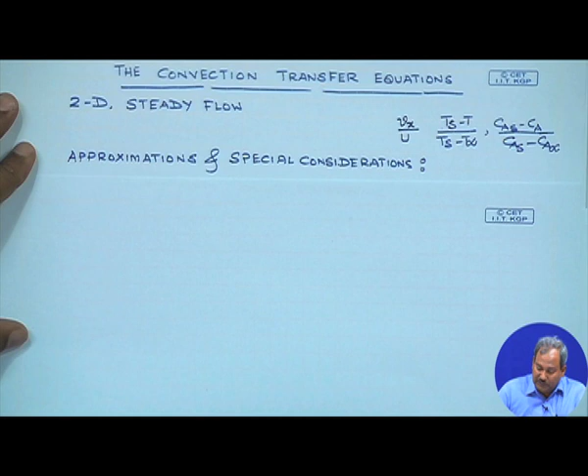Let us see the approximations and special considerations we are going to invoke to see these analogies. First, we assume an incompressible fluid. The fluid properties remain constant. Body force is negligible, so the effect of gravity would be unimportant. It is a non-reacting system, so there is no generation or depletion of component A by reaction, and there is no energy generation.

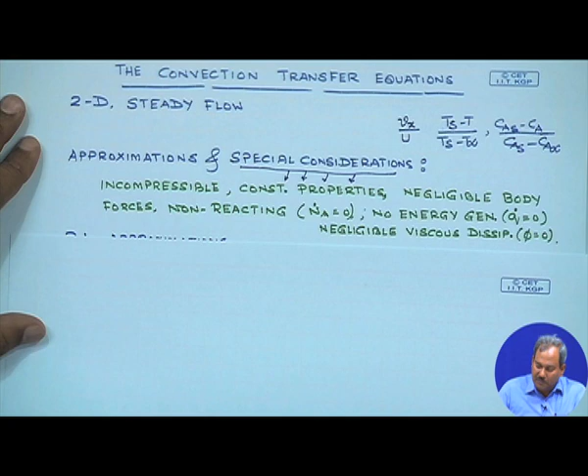So Q dot, the rate of production of energy, is equal to 0, and the flow velocities are moderate, so we have negligible viscous dissipation, or the viscous dissipation function phi equals 0. These are the special considerations we use to tackle simultaneous heat, mass and momentum transfer, and our starting point would be the convective transfer equations inside the boundary layer.

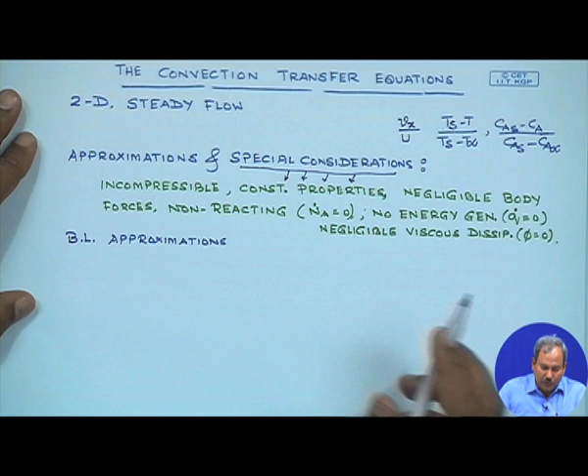So, what we then do is we are going to see what are the boundary layer approximations that we have used so far. We have already used that u, the velocity in the axial direction, is going to be very large in comparison to the component of velocity which is perpendicular to the direction of flow, and variation of axial velocity with y is going to be significantly larger than variation of the velocity with respect to x. So, del u del y would be significantly larger than del u del x, and it is also going to be very large compared to del v del y and del v del x.

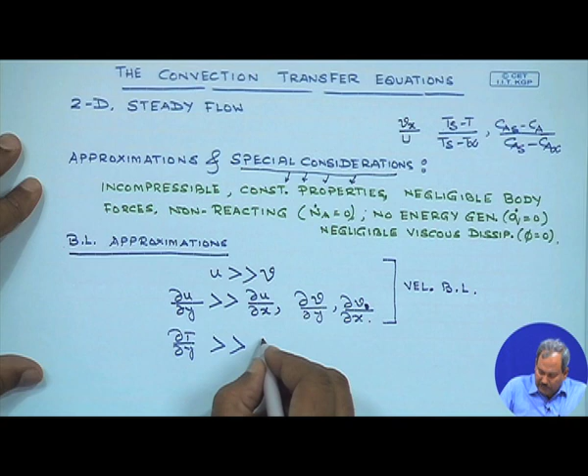So, the rate of change of axial velocity with distance from the solid wall is going to be significantly higher than del u del x, del v del y and del v del x, and collectively these are known as the boundary layer approximations for the velocity boundary layer. The second one that we have is del T del y is going to be very large compared to del T del x. So, T is the temperature.

So, the variation in temperature over the thickness of the boundary layer, del T del y, would be significantly higher than the axial temperature gradient, and this is the approximation which we have used before for the thermal boundary layer. All these assumptions are reasonable since the thickness of each type of boundary layer is very small.

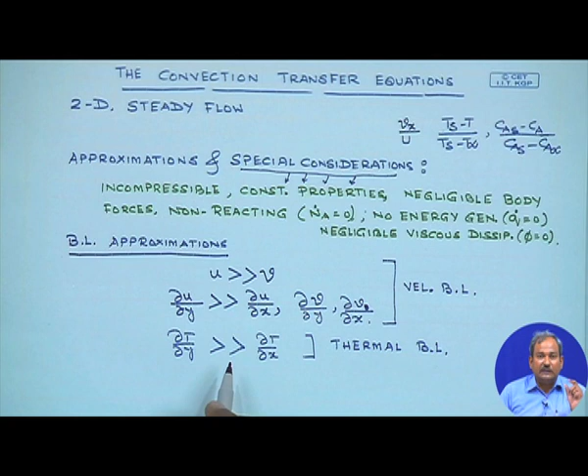So, since the velocity boundary layer is small, the variation in velocity from a value equal to 0 due to the no slip condition on the solid to the constant velocity U throughout the rest of the region outside of the boundary layer takes place over a very thin region. So, therefore, the variation in velocity with respect to y will be significantly more than the variation in velocity with respect to x. So, the vertical velocity gradient of the x component of velocity would be much more as compared to the gradient in the axial direction.

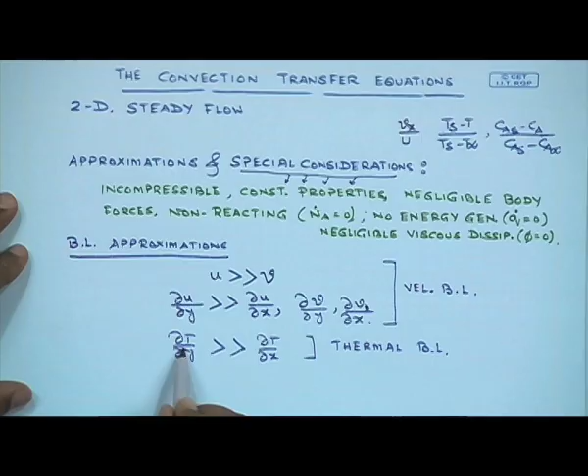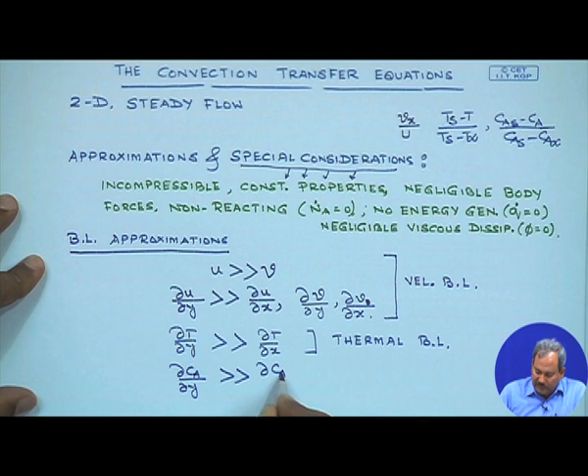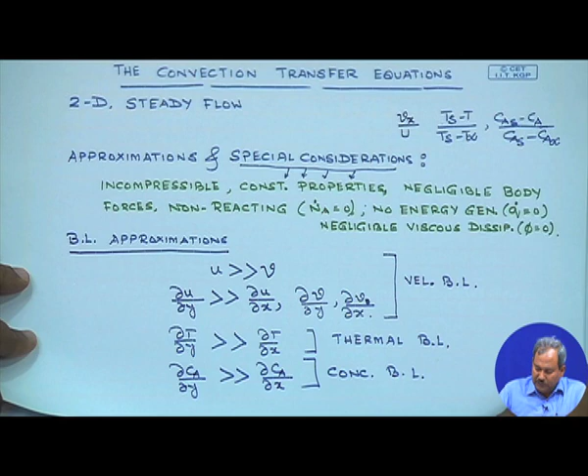Using the same logic, the temperature varies from Ts, which is the temperature of the solid substrate, to T infinity, which is the temperature outside of the thermal boundary layer. This changeover takes place over a very thin thermal boundary layer. Therefore, this gradient is going to be very large as compared to del T del x. Using the same logic, one can write that del CA del y is going to be very large compared to del CA del x. So, this is for the concentration boundary layer. So, these are the approximations which we have used and which we are going to use in our subsequent studies of the analogy.

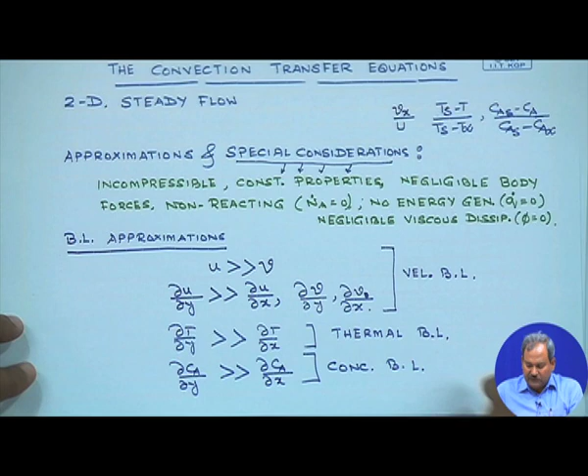Some special considerations here. There will be situations in which, let us say, species transport is taking place from a solid surface. So, would the species transport affect the transfer inside the boundary layer? Let us say you have sublimation taking place from a solid surface into air. So, the velocity may not be equal to 0 on the solid plate, since you have a phase change. In situations like that, is it reasonable to assume that the transport operations are going to be unaffected by the absence of the no slip condition at the solid surface?

What has been observed is, unless you are talking about a significantly high transformation taking place at the solid liquid interface, all the considerations that we had discussed so far will still prevail. Only in cases such as steam condensing on a solid surface will the additional heat transfer process affect the growth of the velocity boundary layer or the concentration boundary layer. But for most practical considerations, the effect of species transport can be neglected while developing these boundary conditions.

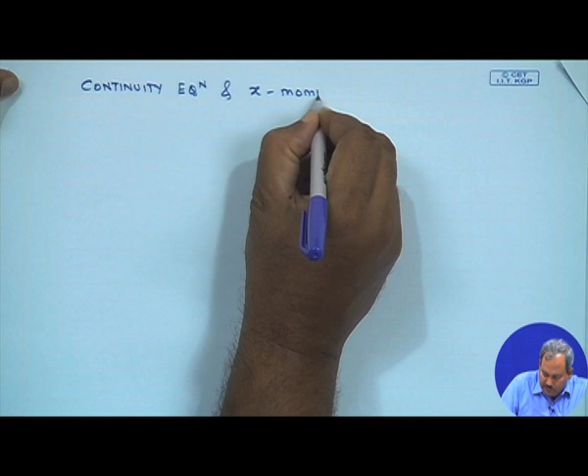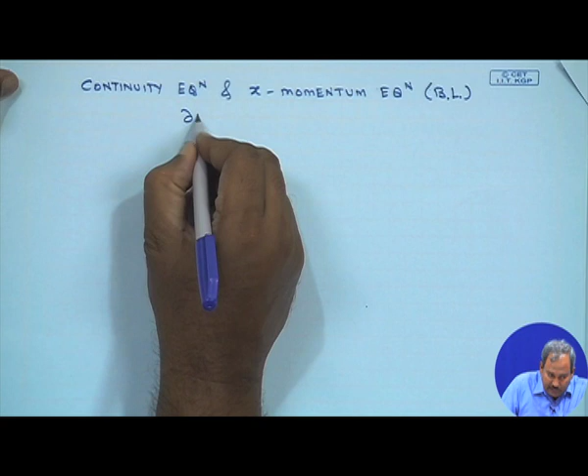So, now I think we can start the equations. I would simply write these equations for this class, and then we will discuss their implications in the next class. So, for the case of the velocity boundary layer, we know that we have the continuity equation and the x momentum equation inside the boundary layer. This is the continuity equation, and the x momentum equation is u del u del x plus v del u del y.

This is the x component of the Navier-Stokes equation utilizing the approximations of boundary layer that I have discussed so far, equal to minus 1 by rho del p del x plus nu del square u by del y square. So, this is my equation number 1, this is the equation number 2.

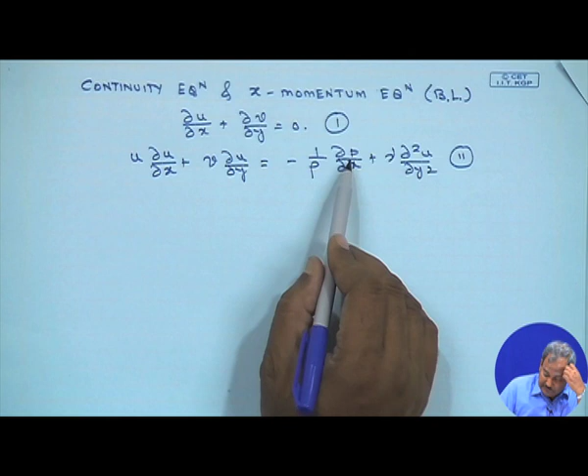Now, if you see carefully, I have kept this del p del x term in the x momentum equation, signifying that I am not restricting myself to the case of flow over a flat plate only. So, as long as I have this dp dx in here, my situation is equally applicable for flow over curved surfaces as well.

So, the equations in this form refer to laminar flow over a solid surface that may be flat, in which case dp dx would be 0, or it could also be for a curved surface with dp dx which may not be equal to 0.

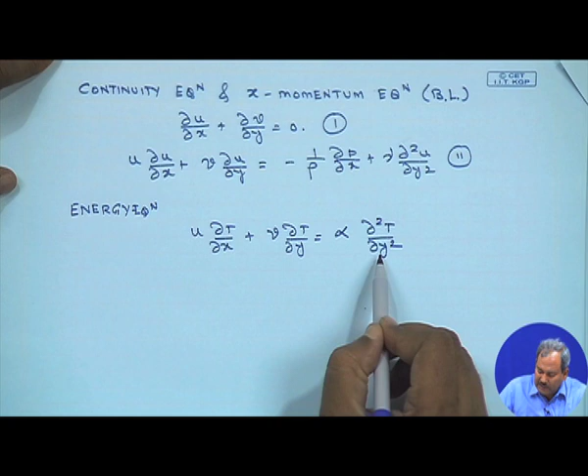Similarly, the energy equation would be u times del T del x, u being the velocity, plus v times del T del y is equal to alpha, which is the thermal diffusivity, equal to k by rho Cp, times del 2 T by del y square. We have discussed already why del 2 T del x square can be neglected in this case, since the temperature varies sharply with y.

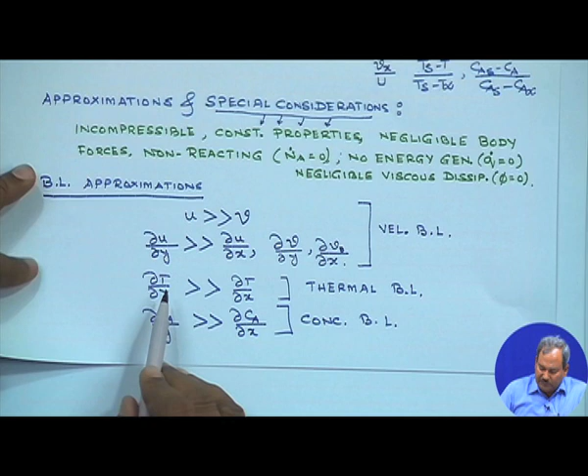Therefore, since this is valid, del T del y is very much larger in comparison to del T del x. The right hand side of the equation refers to conductive flow of heat, and the conduction in the y direction will far outshadow the conduction in the x direction. Therefore, there is going to be only one term.

I do not have q dot, which is heat generation per unit volume. I do not have this term, as well as the term mu times phi, where phi is the viscous dissipation term. So, these two terms are not present under the conditions that I am describing right now. So, this is my third equation, which is the energy equation inside the boundary layer.

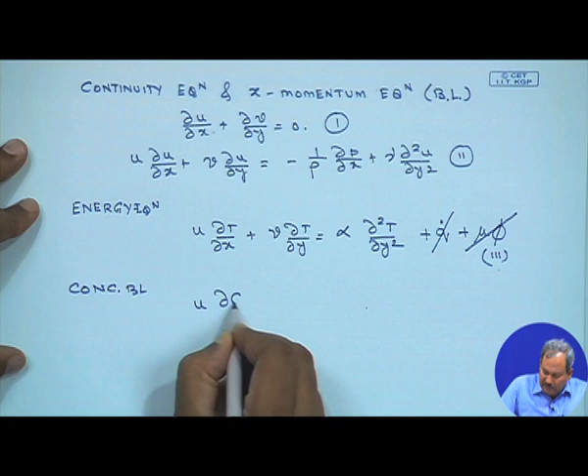Then for the concentration boundary layer, what we have is u times del Ca del x plus v times del Ca del y, and the relevant transport coefficient here is going to be DAB times del square Ca by del y square. As before, I am not considering any reaction taking place inside the boundary layer. So, it is a non-reacting system. Therefore, the effect of reaction would be 0.

And the transport of species A through diffusion in the y direction will be significantly more than the diffusion of A in the x direction. So, the del square CA by del x square term is neglected the same way I have neglected del square T by del x square. So, conduction and diffusion in the y direction predominates over conduction and diffusion in the x direction.

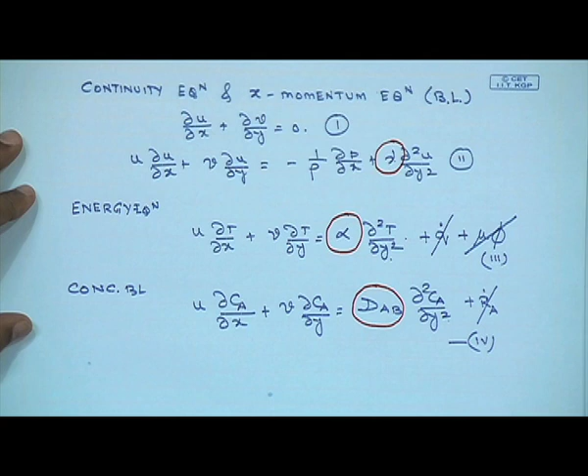And if you again notice, the transport coefficient here is kinematic viscosity, which is mu by rho, this is thermal diffusivity, which is k by rho Cp, and this is simply the mass diffusivity. These transport coefficients dictate how the diffusive transport process is taking place. These equations can then be used to identify key boundary layer parameters, the similarity parameters, as well as the important analogies between heat transfer, mass transfer and momentum transfer.

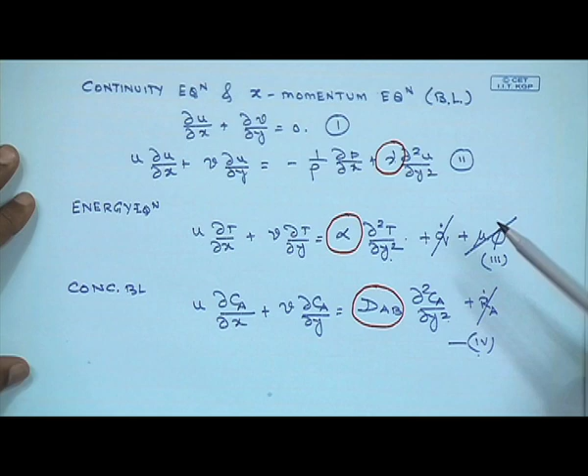So, in the next class we will start with these three equations, express them in dimensionless form, express all the boundary conditions in dimensionless form as well, and then we will try to see under what special conditions the governing equations will look identical, the boundary conditions will be identical.

If we have the same form of governing equation and same form of dimensionless boundary conditions, then the two systems, let us say one having heat transfer and one having mass transfer, will become dynamically similar. In order to become dynamically similar, the governing equations should be the same, and the boundary conditions in dimensionless form should be the same.

When the two systems become dynamically similar, the expression for one type of process can be used as the expression for another type of process. In other words, the heat transfer equations can be used as mass transfer equations, as long as, and this is important, we change the relevant dimensionless parameters of heat transfer by the equivalent relevant parameters for mass transfer.